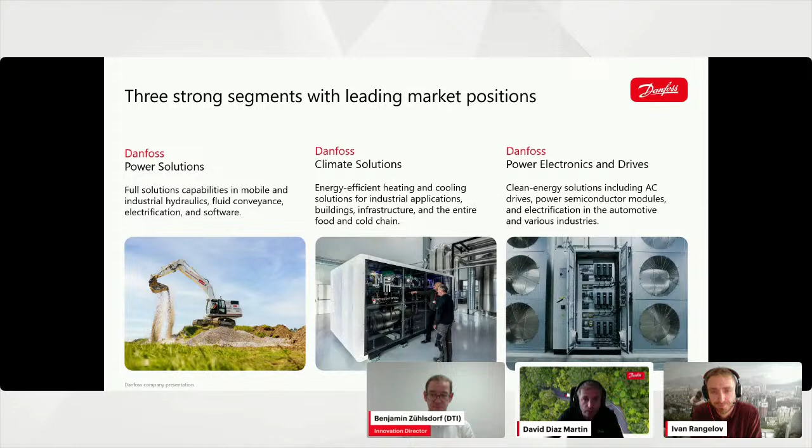I hope you'll be able to see my slide 3 here with the table of applications. I think you are sharing the wrong screen again. It was working better in the preparation, I must say. No worries, that's the issue of being live. Yeah, we are very natural. I think again you are sharing the wrong screen. I think it's the one with the Restream platform, the one we are using for the live stream. David, do you mind sharing from your screen? I can, yes of course. Let me just move to the relevant slide. There we go. Can you please click up a couple of times so my animations appear?

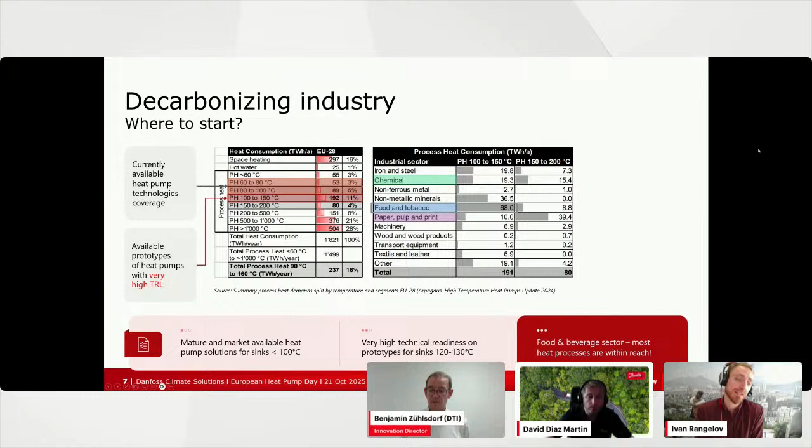So I have already been talking about this slide, so I don't want to repeat it again. A quick summary: up to 100 degrees centigrade, all technologies are completely available. Above 100 degrees, there are innovations already partly available, various ones. I would recommend looking into food and beverages as a natural start for applying industrial heat pumps for decarbonization. There are many other industries that can also benefit from heat pumps, such as pulp and paper, textile, chemicals. But if I have to pick a place to start, this is food and beverage applications.

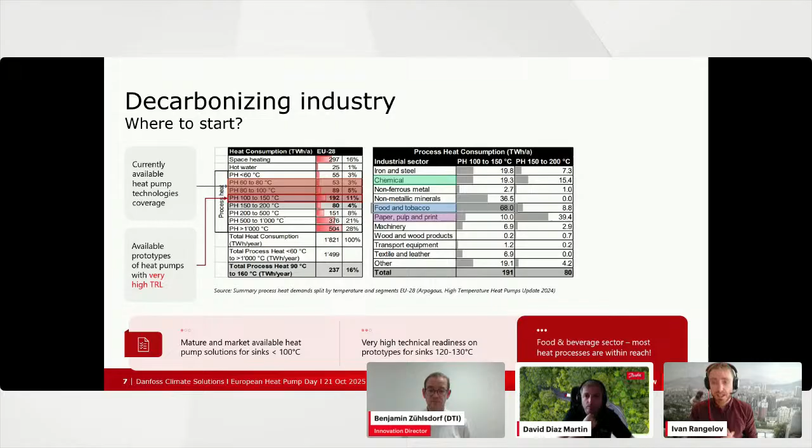Next slide please. One example I have prepared today is a food and beverage application, namely a brewery where a couple of years ago three heat pumps were installed, replacing an existing and obsolete refrigeration system for cooling glycol and a gas boiler. Three heat pumps with natural refrigerants, entirely hydrocarbons, for both process cooling and process heating, using three refrigerants: propane for cooling, isobutane for heating up to 100 degrees, and for steam generation up to 130 degrees, or 3-bar steam, butane is used.

In this example, capacity is about half a megawatt, and the system has been operating already over a year. There we have various components, starting with the compressors and also some line components. An important part here is that this application in food and beverage includes consecutive cooling and heating. And it's not only about brewery; the same logic, refrigerants, temperatures and capacities can be applied also to meat processing, dairies, fisheries, poultries, and many others. Capacities vary from as low as 80 to 100 kilowatts up to, I would say, high runners at 1 megawatt per heat pump thermal capacity.

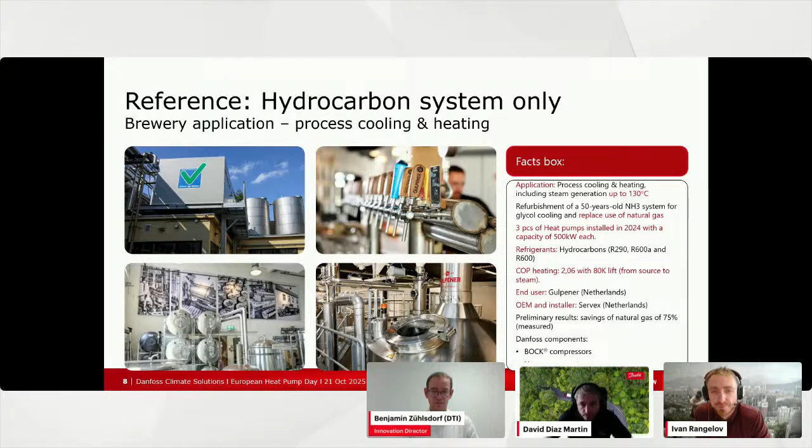What development has been happening and is still ongoing so we can address these industrial applications and completely get rid of fossil fuels? In the last years, we have been working on large scroll compressors for high temperatures, up to 100 degrees. These applications can be addressed with our new developments of scroll compressors using environmentally friendly refrigerants—hydrocarbons and low GWP refrigerants—from 80 kilowatts up to around 1 megawatt system thermal capacity. This is also what we identified as highest for use in food and beverage.

An obvious application is a booster system where you could use 30, 40 degrees waste heat and boost it up to 80, 90, even 100 degrees with a scroll compressor. Also already available and launched earlier this year is our semi-hermetic piston compressor using the natural refrigerant isobutane, delivering temperatures up to 120 degrees. This is already a product in use and completely launched, which can be implemented in steam generation technology—you can deliver up to 120 degrees and generate steam efficiently.

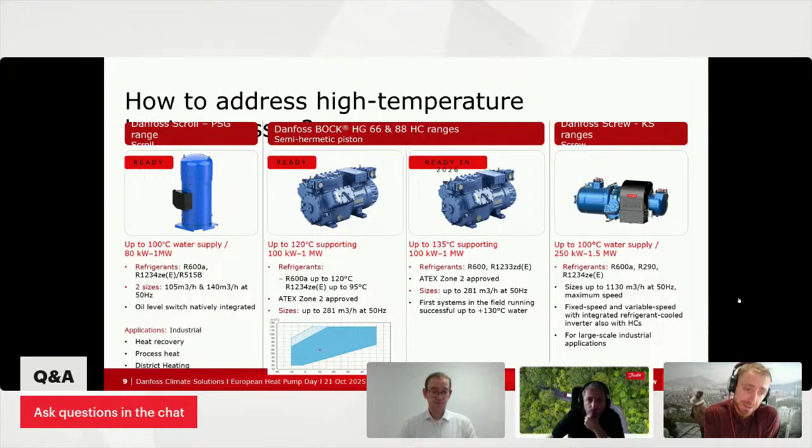What is at high readiness level for development is the next step, going up to 135 degrees—also a semi-hermetic piston compressor. We have various prototypes running in the field in labs, and this one is targeted for release next year.

What is exciting is that since the beginning of this month, we in the Danfoss Compressors family have a new member: the Danfoss semi-hermetic screw compressor, targeting heat pump applications up to, for the moment, 100 degrees centigrade. Going forward, we will also develop it for higher temperatures—120 and 130 degrees—and capacities up to 1.5 megawatt thermal capacity per compressor. We are very happy to welcome this new product on board, as we realize that if we want to efficiently target industrial decarbonization, we need a complete portfolio. There is not one size or one technology that fits all. Therefore, we work on several tracks.

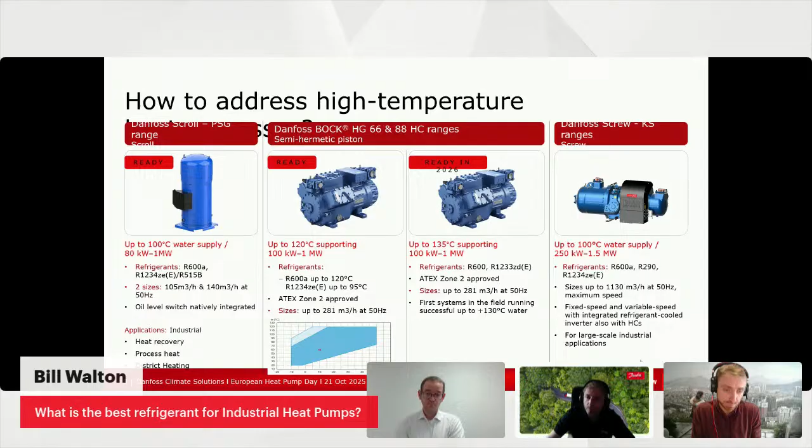Super, thanks a lot. And we have another question from Jesus Vallejo. I would also like Benjamin to chip in here, because Jesus is asking what is the technology readiness today. I think Ivan, you can speak from your point of view, but I would also like you, Benjamin, to give your inputs here. So whoever wants to start with this question.

Benjamin, go ahead. Yeah, I can comment on it. I think this is what it's all about, right? The technology readiness today, there are technologies which are commercially available. We can see some of them here. They're available directly as compressors, or heat pump systems based on those. But I think what has to be clear is that the market is developing rapidly at the moment. It's really new technologies, every week being released here, we are increasing in temperatures. The market becomes more competitive and so on. So it's developing very fast, and I think that's what it's about. The market is becoming more competitive for a bigger range of applications.

Super, then Ivan, your turn. And I fully agree here. This is why you see we have been acting very rapidly in Danfoss, or at least as rapidly as we can. In Danfoss and the refrigeration industry, a lot has been happening. I would say a lot more has been happening in the last 5 to 10 years compared to the last 50 years in refrigeration development. So indeed, exciting times for the industry here.

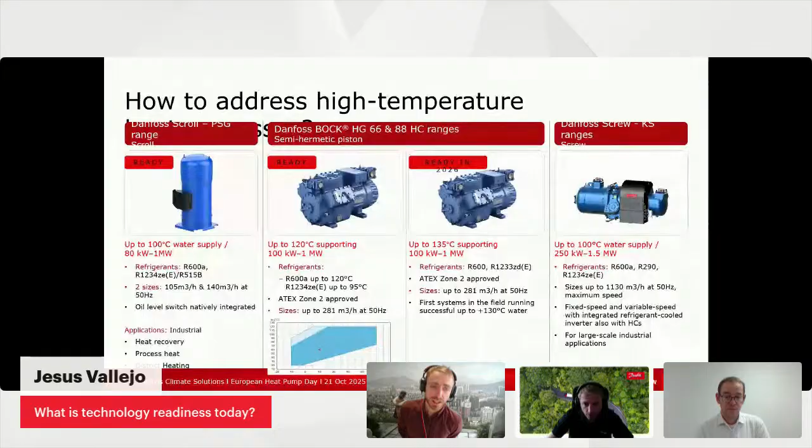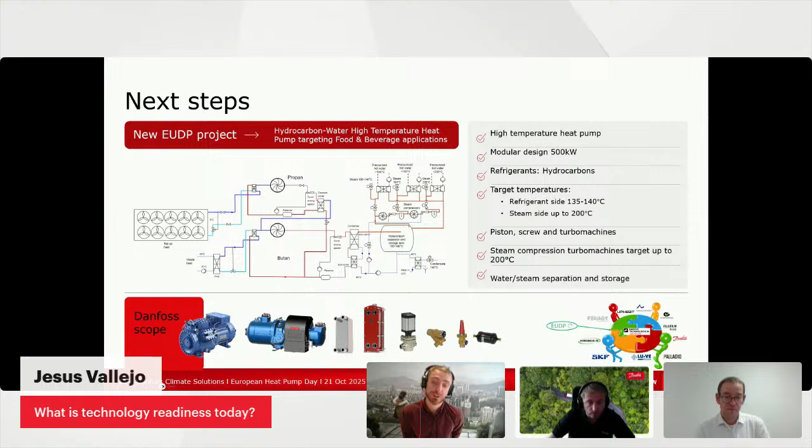If you can jump one slide, David, and go to my last one, because I'm looking forward to Benjamin's materials also. Next one, please. I already touched base on Danfoss screw compressor. This will allow myself to go directly to this one. What are the next steps addressing these high temperature applications in industry?

We started a new EUDP funded project at DTI together with Benjamin and his colleagues in Denmark, where with other partners in this project, among others Fenergy, we will build a heat pump which can go up to 200 degrees centigrade, made of several modules: a hydrocarbon module going up to, let's say, using propane, up to 60, maybe 70 degrees hot water, connected in a cascade with butane, which can lift up to 130, 140 degrees, another refrigerant, also hydrocarbon, also natural, generating low pressure steam, which will be then recompressed by MVR cycle or vapor recompression cycle up to 200 degrees. This is, in our opinion, extremely relevant for food and beverage decarbonization, where we can generate low pressure steam with hydrocarbons, among others, and if there is need for higher temperature than this 130, 140 degrees, we can recompress it with vapor cycle up to, let's say, up to 200 degrees.

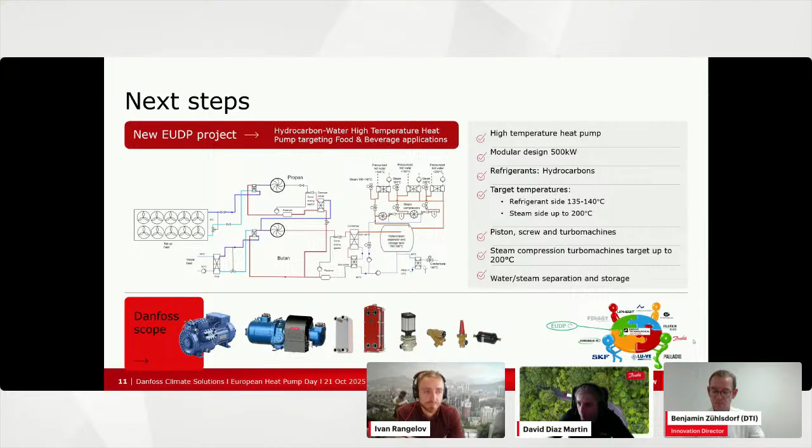Before we move to your slides, Benjamin, we have received 2 questions. Sorry if I do not pronounce the name correctly, Srinivasan, but he's asking what's the heating solutions available for the Indian market?

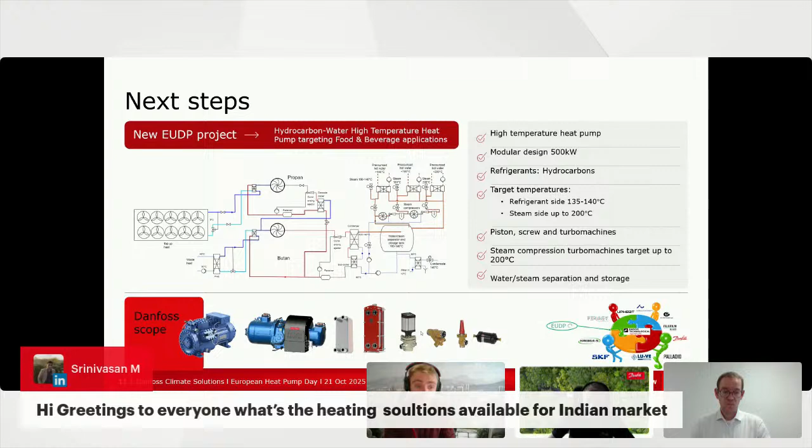I would say that all of them are available also for the Indian market, as long as there is market interest. Actually, we already have been working with a couple of companies interested to develop industrial heat pumps to generate steam. In India, we already have a running prototype on CO2 as a refrigerant with a Bock compressor, running for a couple of years, starting with 120 degrees. Next step is 130, 140 degrees.

CO2 is a very, very good refrigerant if the right conditions are there, just like every other refrigerant. The specific thing about CO2 is that you need a very low return water temperature if you want to deliver high supply water temperature. So this is an application which, if the conditions are there, will be a super fit for CO2. This is also why I didn't mention CO2 earlier. It's a niche application, but India is a good example.

Thanks a lot. If we move to the next one, it's from Madhur. He's asking, in the last slide, why CO2 is not mentioned. But I think I was a bit faster replying to this one, Madhur.

I did not mention it because I do not see CO2 in the largest picture, as often the water return temperature is at high levels, 50, 60, 70, 80 degrees, while CO2 is a brilliant refrigerant if the right conditions are there, namely low water return temperature. If the return temperature from the process is 10, 15 degrees centigrade, then yes, indeed, we can use CO2 as a refrigerant and generate steam, and it is a good fit. But unfortunately, there are not many of these applications. Nevertheless, it can be used, yes.

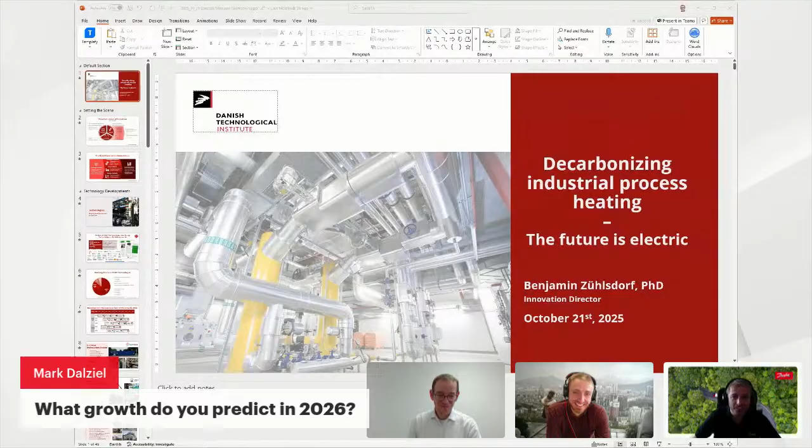Thanks a lot. Benjamin, if you want to share your screen, we can proceed with your slides. Yeah, perfect, I will just share it. Good luck with that. Does it work here? It does. Okay, perfect.

Yes, Ivan, you already said it - we're working a lot with R&D projects. What I would say we are working with is actually bringing new technologies into application, and we do this mainly through three services. From DTI, we support technology owners in developing their technologies. This can be compressors, heat exchangers, or entire systems.

We can test them here at DTI. We have quite an advanced test center where we can test everything from components to entire systems, from first-of-a-kind systems to standardized systems, everything from -50 to +200 degrees, and everything from a few watts to actually a few megawatts. I think we tested up to 3 megawatts here at DTI.

Besides testing and developing, we do also integration, because if we work with new technologies, it's not always trivial how to actually bring them into application. So we actually also have quite some experience on how to work with new technologies, how to integrate them properly, how to de-risk working with new technologies, and so on.

And with that, we are often asked, what do we have to do? I mean, you said it, Ivan, there's a lot of things going on, new technologies becoming available. So what do we need to do to bring all these new technologies to the market?

Well, of course, first of all, technology awareness - many stakeholders have to be aware of what happens, what's possible with heat pumps. What are the myths about heat pumps? There are many assumptions, myths out there. So technology awareness, how to use these technologies, is very important.

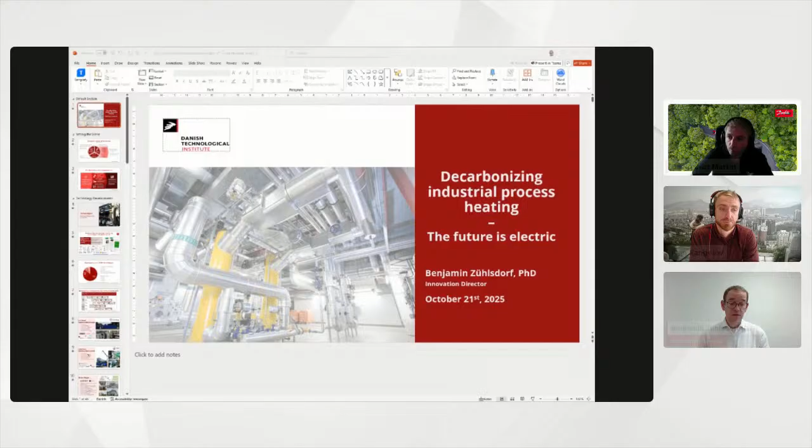And this is very much what you said. There are technologies which are absolutely proven up to 100 degrees. We can also see commercially available technologies - we've seen it here up to 120, 130 degrees. We can also see first technologies coming to market for up to 150, 160 degrees, and then also steam compressors even higher. So pushing this curve, being on the forefront, there will be a lot of learnings along the supply chain. But let's start with having a look at the technologies.

We did an overview here, which is already a few years old. It's based on this IEA heat pumping technology program.

Sorry to interrupt, but I think you are not sharing the full screen mode, just the slides themselves. Just showing the slides itself.

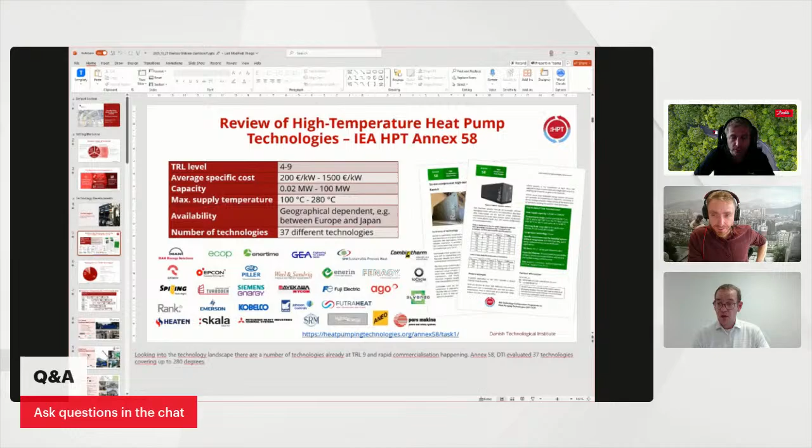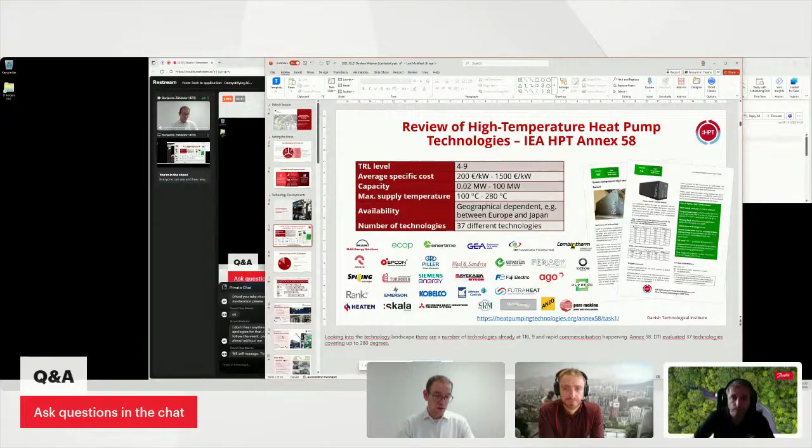Yes, okay, then I will share the screen instead, right? Yes, please, let me see. Entire screen here. Okay, so what about now? Perfect, thanks a lot, perfect.

Okay, well, this is in the review of... I think we are also having connection issues with what we did as part of the IEA. Annex 58, HPT, can you hear us? You were frozen. I can hear you, I can hear you perfectly. Okay, it seems you are back. But okay, let's continue.

But let's say when we started Annex 58, the situation was like: we knew heat pumps could be built for temperatures up to basically no technical constraints, really high temperatures, and we knew they're going to be the most optimal technology for maybe up to 200 degrees. And we knew this could be built, and we asked technology providers, why don't you develop these technologies? And they said, well, because no one is asking for it. And then we were like, okay, maybe no one is asking for it because you didn't tell them that you could build them. And then we started to say, okay, there's some need for communicating what can be done.

And this is why we did this review about what technologies are on the horizon, let's say, for the temperature range above 100 degrees. And we managed to find almost 40 technologies here. Again, it's a few years old, we're currently repeating it, and there will be even more than this. And well, there we saw that many technologies are becoming available and are being developed.

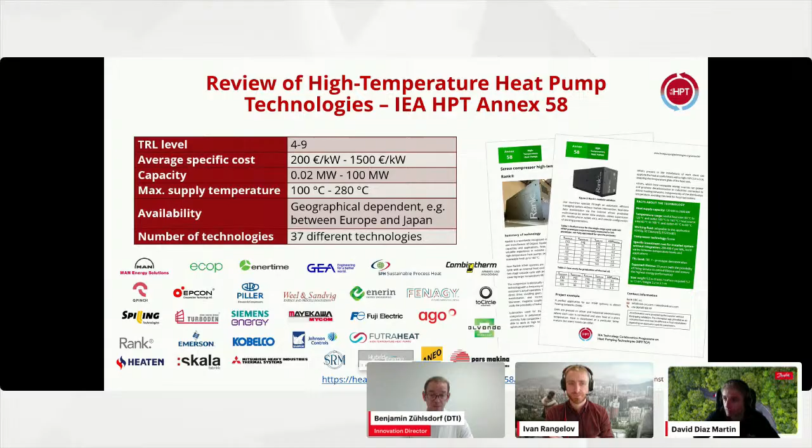There has earlier been a question about what are these technologies based on. We have seen the Danfoss portfolio, and we have seen what these technologies were based on. The first developments here, two-thirds were based on natural refrigerants directly, and some were based on HFOs, and some even back on HFCs. And when you then dig a bit deeper, you can notice that many of those who are actually having the first developments based on an HFO product are developing an equivalent product based on hydrocarbons. And when I update this, I can tell you that there are only a very few companies left who have only HFO solutions and, let's say, dare to not have a natural refrigerant-based alternative. So I think the trends are clear here - it's going towards natural refrigerants.

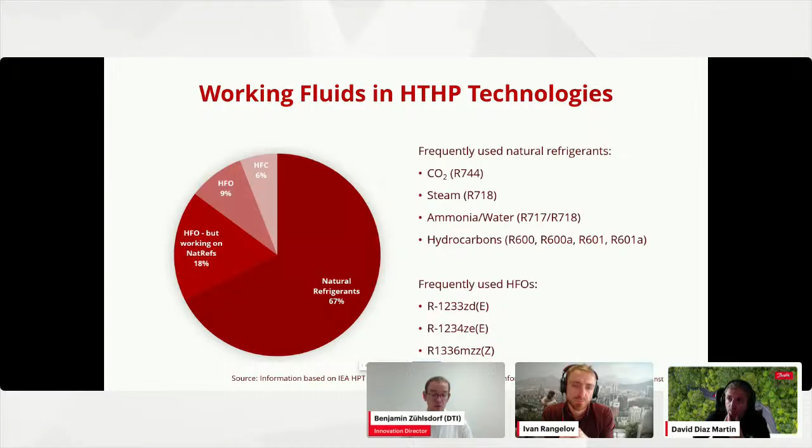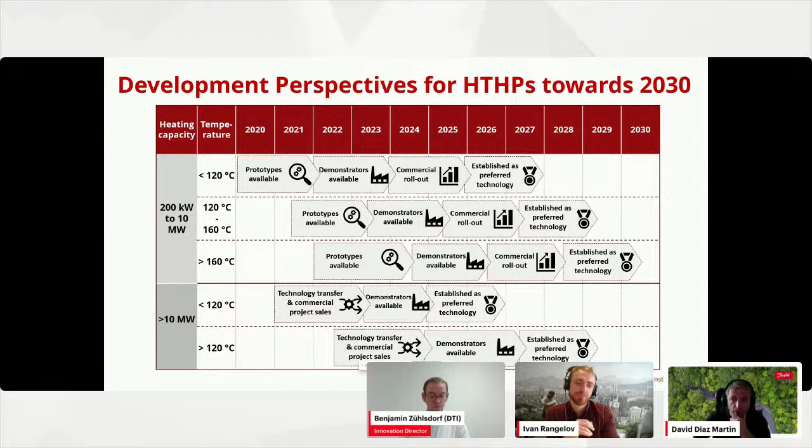And then these technologies - if I can interrupt you here, because there is a question also around technology use and also what kind of technologies and market developments do you expect for the coming years? And I think this is also aligned with what you are explaining at the moment, I would say.

Many technologies are becoming available for higher temperatures. I divided this figure into, let's say, up to 10 megawatts and above 10 megawatts. Up to 10 megawatts is the kind of technology we're discussing here. We've seen many products coming or being commercially rolled out up to 120 degrees, and we see they're becoming preferred technologies.

We see that the technologies are being demonstrated up to 160 degrees, and it's being commercially rolled out right at the moment. Above 160 degrees, there's maybe 1.5 to 2 years delay or so. We've seen the project just being started here, with Danfoss also involved. So there are some things going on regarding technology development.

But I think there's also something about the market generally becoming a lot more competitive. There are many competitors and technology providers coming onto the market. The prices are also becoming more competitive, becoming more aligned. It's more proven technology, and there are more reference cases out there. So this is really about bringing the technologies onto the market.

I believe these are really the main developments we see at the moment to build what's possible, because we really need it. Many have targets for 2030 already, and 2030 is quite soon. Heat pumps are one of the main technologies which need to be adopted.

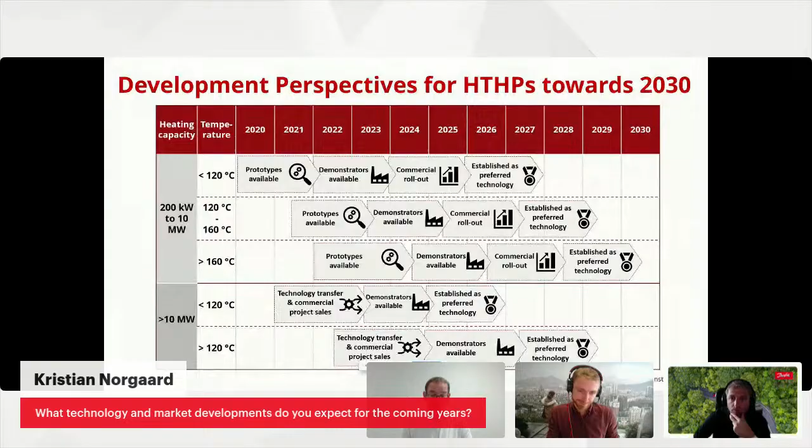Thank you. We said it. You've shown an example of the projects we typically do, Ivan. Here's another example which has actually been done a few years ago.

That's a container which we tested here at DTI, and inside this container there's a high temperature heat pump. We have it with Bock Danfoss compressors here. This is a G88, which you've seen before, with hydrocarbons, butane and isopentane, up to 150 degrees. This is something which has been tested here.

Again, I'm talking about the scaling of supply chain. You've seen, okay, we have a system manufacturer included here, but of course Danfoss provides to all system manufacturers which want to have the products, and you've seen the compressors being used. I believe they were also used in the case from the Gulpener brewery. So this is what we talk about: demonstrating the technologies and then making sure to scale them across the market.

Exactly. If I can comment on this one, this is exactly one of the couple of projects thanks to which we now have released the compressor up to 120 degrees. This is really a collaboration in the different bricks of our industry: manufacturer of components, test lab, research institution, end user, and OEM. We really need to work together, and that's a super example. Thank you for the addition here.

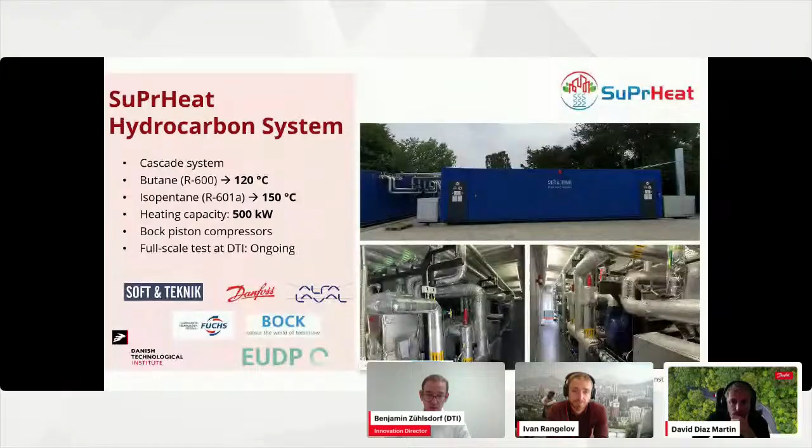And of course there are also some other technologies here, some other manufacturers with similar targets, just to show, let's say - I said the market is becoming more competitive. So it's really a number of technology providers which need to be on the market to get it really competitive and available at broad scale.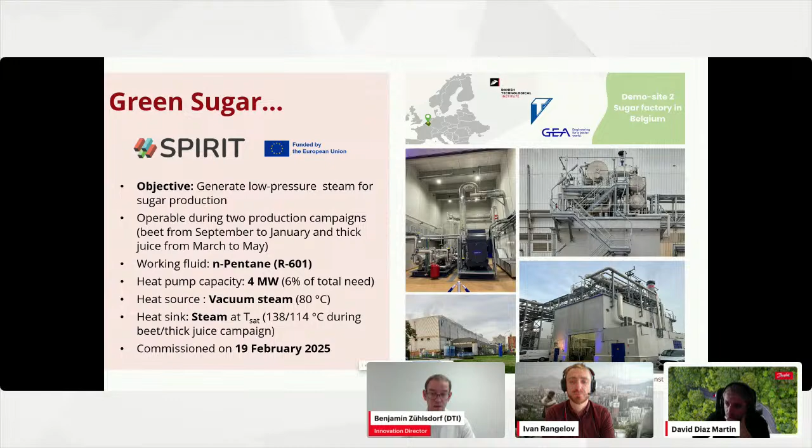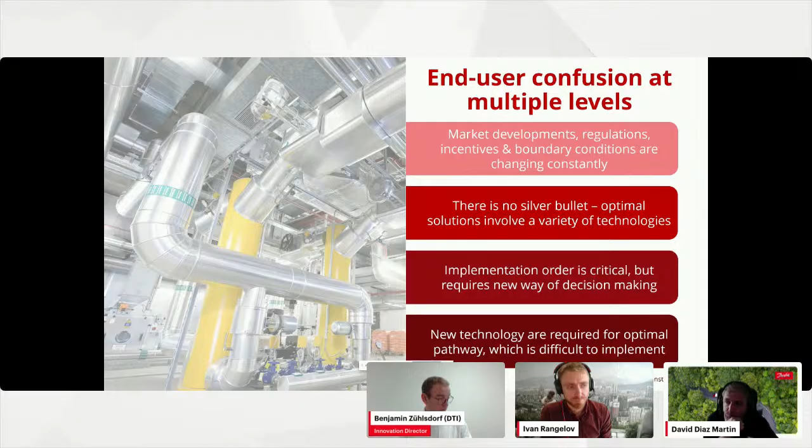So it's really ranging from everything. We've shown many applications with a few megawatts heating, but really up to utility scale here. So many technologies becoming available, and what's important, let's say, when we look at end users - these are the ones I'm referring to who own heat pumps, which is why I call them end users. So production facilities for food and beverage, for example, they're being urged to decarbonize.

But the market developments are there. There are some regulations which are being changed constantly. Incentives come onto the market. Gas and electricity price ratios are changing constantly. So this is giving some challenge for them to put a baseline for the decarbonization.

We're talking a lot about heat pumps, but as much as I love heat pumps, there's no silver bullet, not even a heat pump. But we see a heat pump is always, or very often, a part of the final solution.

And here it's very important to get an overview of what other technologies also to integrate: thermal storages, electric boilers, electric resistance heaters, and so on. The order of implementing all these solutions for an entire site is very critical. So you typically need a decarbonization roadmap to really find a good way to decarbonize your systems.

New technologies are required here too. Much of the heat is required at these temperatures, and we're having first systems up to 120 degrees. But for some end users, they are very conservative, so there's still some hesitation to go for it. It's not easy to work with new technology, so there's some end user confusion at multiple levels.

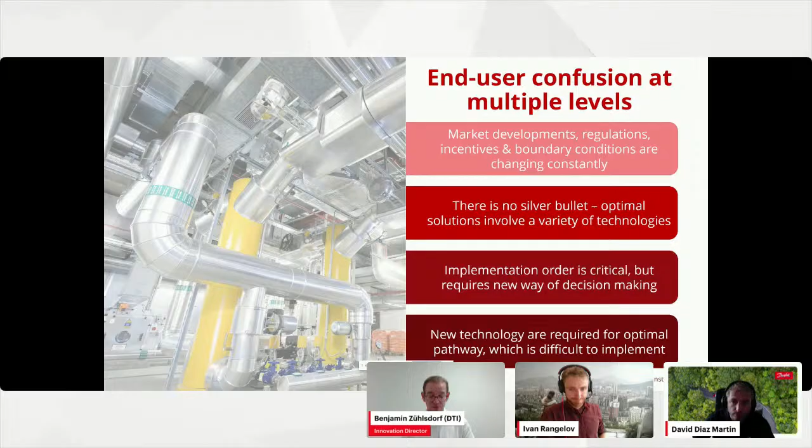This is where we really need to collaborate along the entire supply chain to demonstrate these solutions and bring them into application. And we do it from DTI by supporting them.

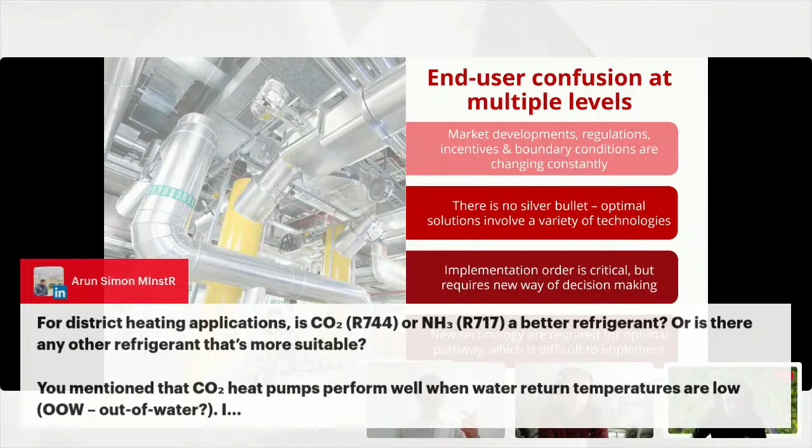Well, as you said, what means optimal? You have CapEx, you have OpEx, you have environmental impact. What I think is clear for district heating applications is you have a number of natural refrigerant-based solutions: CO2, ammonia, and also hydrocarbons, which we see really dominating the market. So that's absolutely clear. Then which one is the most optimal? That's always a mixture of how the district heating company prioritizes CapEx over OpEx, or efficiency versus investment cost, and also the boundary conditions: what are supply and return temperatures, what is your heat source. This can decide between these three: CO2, hydrocarbons, ammonia. But this is kind of what we see.

The second part of the question, I mean it doesn't appear fully on the screen, but I'll read it to you. We've been speaking about CO2 heat pumps performing well when water return temperatures are low. In which applications are such low return water temperatures typically found?

It can be, for example, sometimes in district heating applications, but it can also be in industrial applications. There are industrial applications where you are preheating air or any other media from almost ambient temperatures, and then heating a stream, hot water or air, from 20, 30, 40 degrees up to 100, 120, sometimes even 150 degrees or higher. You can take this share which is in the range you can cover. We've just seen a demonstrator for a CO2 system for an industrial spray dryer for milk powder production, where you preheat air almost from ambient temperatures up to 120 degrees, I think that's what's been built. So that's one of the applications perfectly defined for CO2 applications.

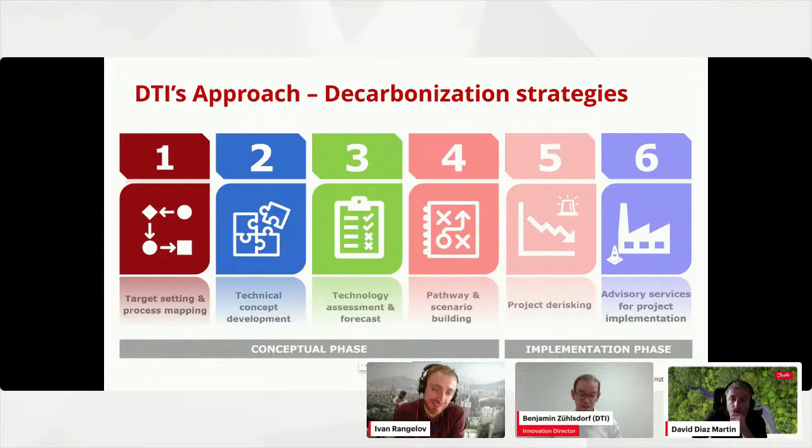Here it's very important - if you want to decarbonize as an end user, it's probably at least a 5 to 10 year journey ahead. And we see it too often that they have a decarbonization roadmap, but it's often too limited to technologies which are proven for years. This means they are disregarding new technologies, and this is super stupid. If you look at a 5-10 year journey ahead and limit yourself to technologies which are becoming old, then you're really missing out. This is something where we can help.

There are some paradigms to take into consideration. I'm not going into detail with them here at the moment, but looking at the time, just to share this.

What is next? When we look ahead a bit, there's the industrial heat auction of the European Innovation Fund. The terms and conditions were published last week. There is actually funding available. It will be an auction-based subsidy where you can request a price in euros per ton of CO2 avoided. Based on the price you bid for this auction, you can determine if you get funding or not. You don't know where the boundary will be, but this is what it will be.

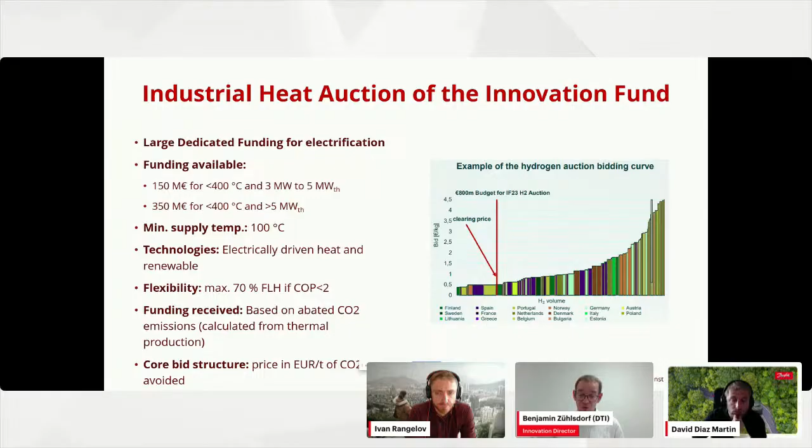And there's big money available - 150 million euros for technologies below 400 degrees in a range of 3 to 5 megawatts thermal, and 350 million euros for heat pump and electrification projects above 5 megawatt thermal. This is currently being published. We are seeing a lot of activities ongoing for this, and we're looking forward to the deadline - I think it will be early next year, somewhere in February or so. This will certainly be a big thing for bringing heat pumps out there.

And then, everybody, you asked a bit for the technology overview. I said it is what we call Annex 58, which is now continued as Project 68.

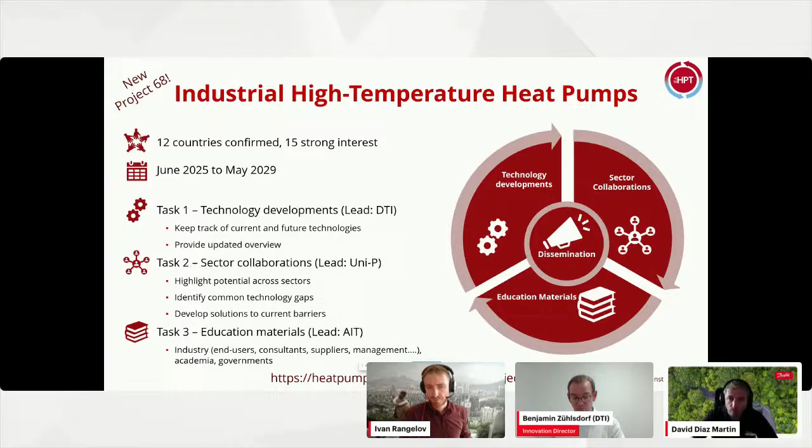By the end of this year, we will actually update the technology overview of high temperature heat pumps, so everybody can see what has been done, what's happening, and what has happened during the last 2-3 years in this field.

And then the last thing I want to share is an invitation to the High Temperature Heat Pump Symposium. You can see how many things are going on here. This is a picture from the last symposium. Last time we had 400 participants. Next time we will have even more.

We have received 130 abstracts or so for presentations here. So there will be many presentations shared, a lot of technical insights. This is a meeting place for the industry, and I know Danfoss will come there too, and you are all invited to pass by and have a look at the presentations. There's also an exhibition area where you can look at compressors and so on.

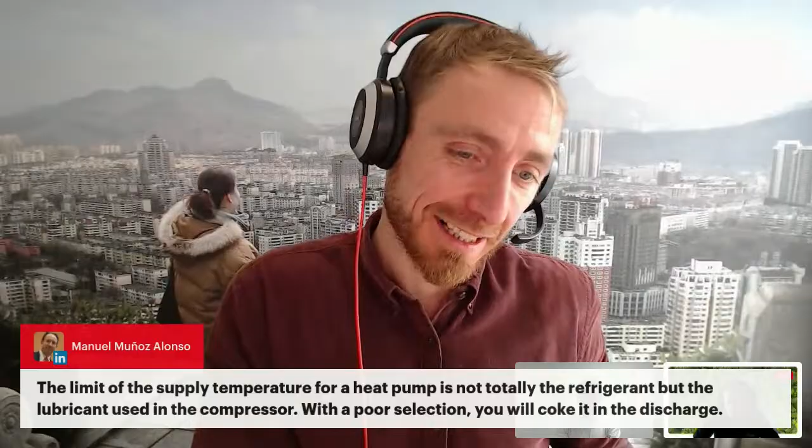I fully agree, and I know Manuel. He's a really, really good expert in oils and high temperature, so he knows what he's talking about. This is a challenge, and the challenge is both on the suction side, because if you have high source, high evaporation, then the lubrication is getting a little bit challenging, but also on the discharge side, if you have a discharge at 200, 250 degrees, that's something which, well, you can very well burn the valve plate of the compressor.

Thanks a lot, and I think we have one last question. Maybe this is for you, Benjamin. What should be kept in mind for projects with novel high temperature heat pumps?

Yeah, I mean, it obviously, as I said, it really requires a proper integration, and you have a proper integration if you have a roadmap for decarbonizing. It's not something where you just look into a catalog and order a heat pump and think, okay, this will work. You have to have a solid decarbonization roadmap, and that's, I think, what it's about. It's about a shift of mindset at end users coming from fossil fuels, going over to electricity-based solutions. And that's something to be clear of. It really requires long-term planning and openness to new solutions, to do things differently than what you're used to. And if that's in place, then you will find good partners who can provide you these heat pumps and make you having a good, sustainable business here.